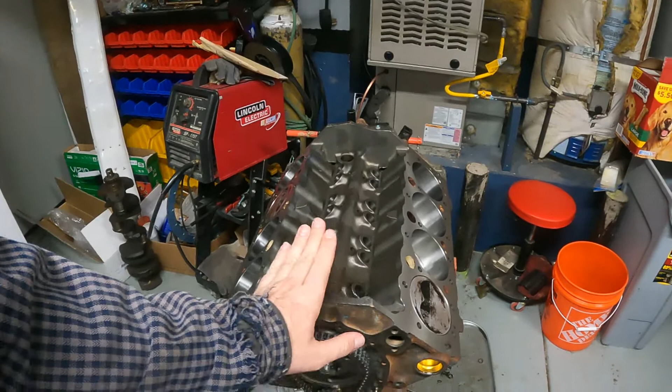I'm Wade Lumsden, and today we're going to jump back on to the hobby stock / street stock build that was supposed to be temporarily for the modified, but by now you guys have seen that I went a different route, and there is a crate motor sitting in the modified. So we'll get back onto that shortly, but for right now we are going to jump back onto this and cover a couple other things. So let's get to work.

Okay, so first things first here. When we did this, it was kind of chaotic, and yeah. Anyways, we did it. We degreed the cam, and then we just moved on. We didn't show you how to check that it was degreed properly. Check it against the numbers on your cam card. None of that. We just degreed it and moved on.

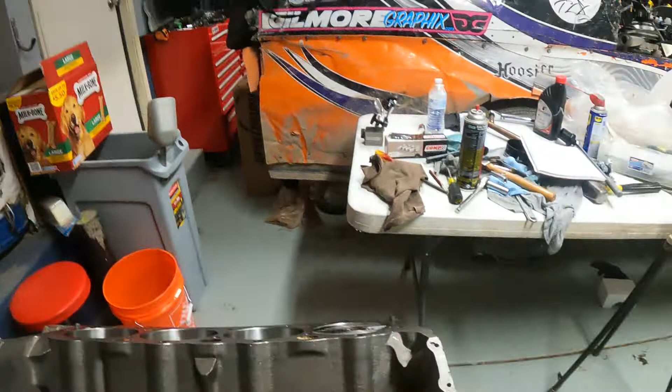And I also did it incorrectly, I guess. I used the lifter that would go to the exhaust valve instead of the intake one. You should do it off your intake. I mean, really, in a perfect world, it works out to do it off of either, because valve timing is valve timing, right? So I should be able to check the locations for the valve timing, and it should still read okay, but really you should be doing it off your intake.

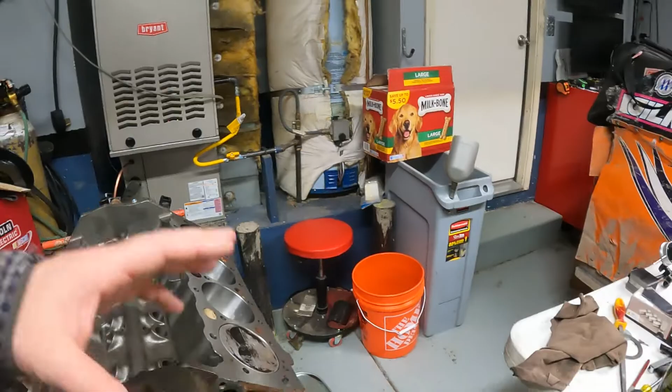So I'm going to quick put this back together, degree the cam one more quick time, and then show you how to verify that it's correct versus the numbers on your cam card. And then the other little piece of this video, there's actually going to be no real assembly. I think by the time we get done doing this, it's going to be a long video anyways.

But we're going to talk about quench, how to find your quench, calculate your quench, and all of that happy stuff, because we are getting really close. Oil pan and oil pump came in, so we're pretty much ready to start putting the bottom of this thing back together, finish doing that, and then we got to move on to heads and stuff, right? So we might as well prep and make sure that we're ready to do that as well. So let's get into this degreeing of the camshaft and checking it real quick, kind of as a part 2 / follow-up of the last video. So here we go.

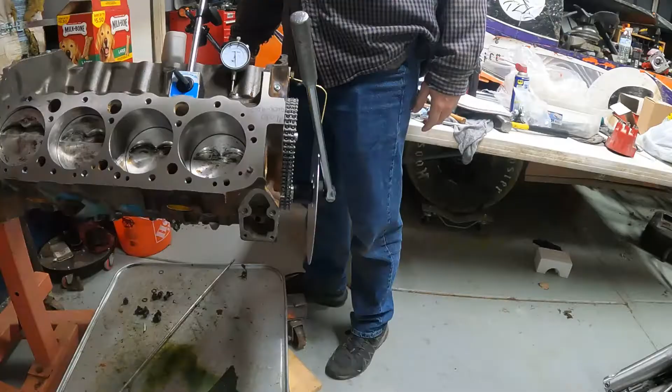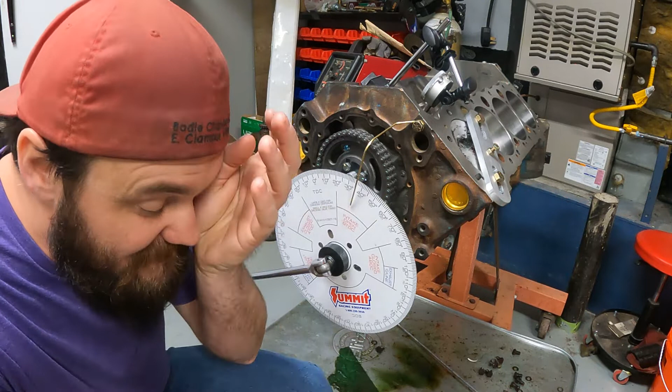Oh my god, I haven't been recording this whole time. All right, well, this is round I don't know how many, because in re-recording all this for you, I just went through this whole process and realized the camera didn't pick any of it up. So here we go one more time. Oh my goodness.

All right, so I got my homemade plate here. Stops my piston before top dead center. Okay, we are up against it right there, and we get a reading at 35 degrees. Now we're gonna go all the way back around until the piston touches again. Okay, and we should get a number, and that number is 1. No, sorry, that number is 4. So we got 35 degrees plus 4 is 39 degrees. Divide that by 2. That is going to be 20 degrees, basically 19.5.

Should be able to crank this thing all the way around. It'll stop there. We're going to back our bolt out so that we can continue on. And then if we go to 19 degrees right there, check it out, 19 degrees, boom. We are now at top dead center. We are at measured top dead center right there. So what we do is we loosen our wheel, and we actually put it to 0 where it is actually top dead center, right?

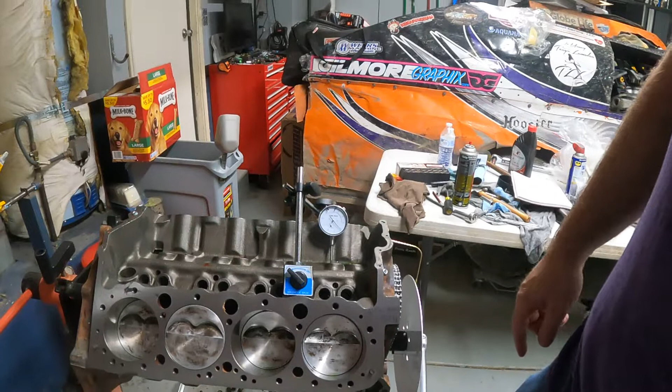Let me lift you guys up so you can see in there just a little bit better. This one's the intake. So this is what we got to do. We now need to find the peak of the lobe lift. So we're going to spin this thing around, and the lifter's going to start coming up.

Like that. And once it starts going back down, we'll know that we found the peak. It's already at 0 because, like I said, I had already done this before. So right there on the 0, great, you'd zero out your gauge if it wasn't, but that's your peak. Now you're going to go 50 thousandths past that when it comes down to the 050 here. Oh, a little bit past.

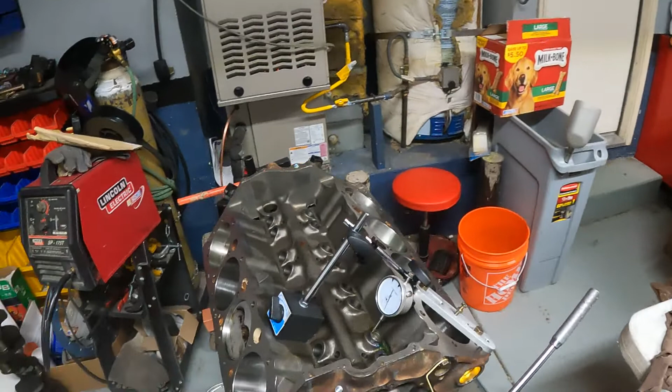So you always want to come to it spinning in the clockwise direction, right? So if you go past, you've got to back up past it and then come back to it. There we go, 50 thousandths. Now I'm going to look at my wheel here and get a number. My number is going to come from the small set of numbers on the wheel, reading in this direction.

And I like to put the tension back in the same direction, because this is just a little bit loose on there, in the same direction as what I started with. So I've got to put a little bit of back pressure on it. And that is going to give us a reading of 29, right? So see how when I drop it down here, it actually drops to like 27, 29, because my 0 was found with tension hanging over here, right? So we're gonna go 29. I'm gonna write that number down, 29 degrees.

All right, and now that we've done that, we're gonna go back up to the peak and we're gonna come back the other direction, which we'll have to pass it and come back to it, 50, boom. And we're gonna get another reading. Our reading here, again, this is leaving some tension going in the counterclockwise direction, and we're reading off the low bottom numbers here, 119. So we're gonna write that down real quick.

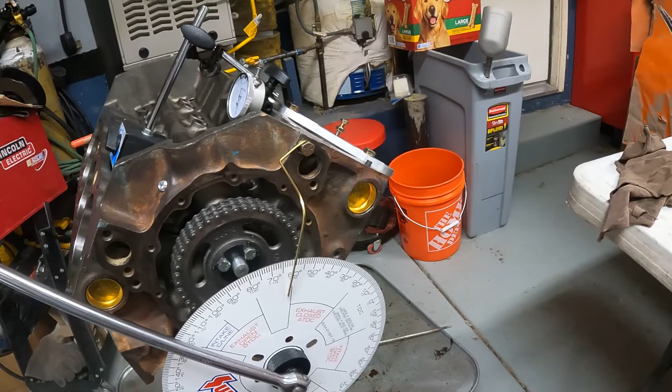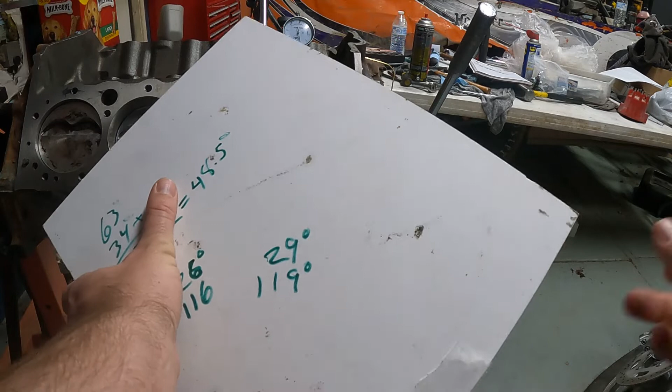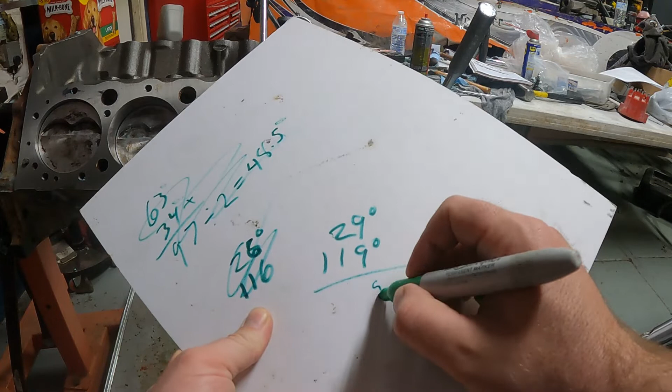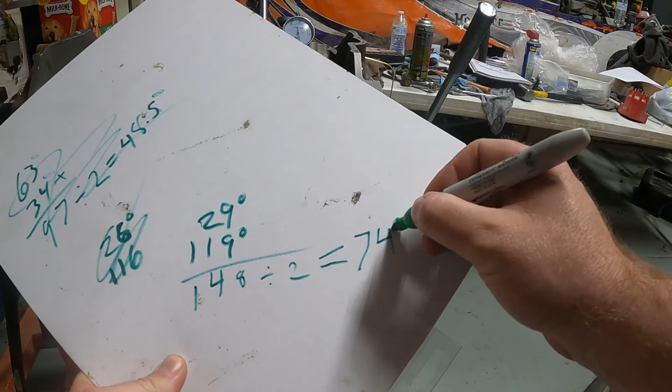All right, so now the important part of this is the 29 plus 119. We're gonna add this together. Don't worry about these numbers, that was from earlier when I had already done this before. We're gonna get 148. We're gonna divide that by 2, and that is going to equal 74 degrees right there. All right, now that we have that 74 degrees, I should be coming to 74 degrees on here.

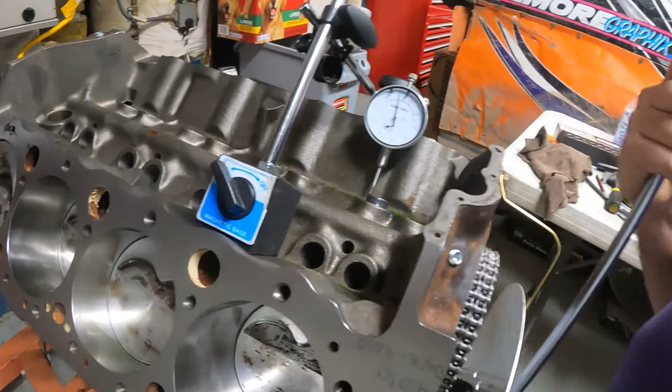Oh, we passed it, sorry. 74 degrees here, which is gonna be right there. And if we did that right, yep, look at that. Lands on the peak. So we know the peak is at that 74 degrees right there. Okay, so now, still using the small numbers here, we got that 74 degrees, and so we rolled this over to 74 degrees using the small number. And if we go up to the large number, we will be at 106 degrees right there.

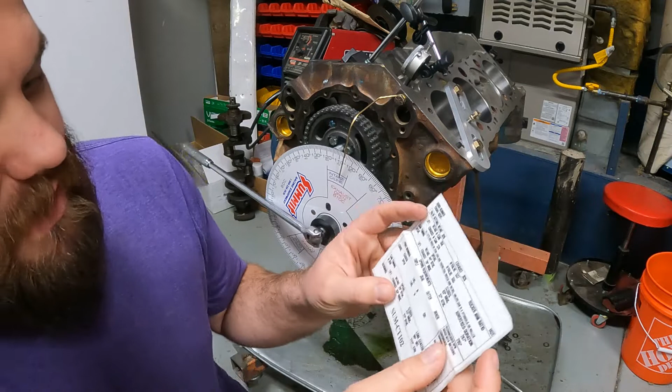So this says that having that set up and putting this at that number that you calculated, this going to the 106, that is telling us that right now the center line, the center of the lobe of the intake valve, is sitting at 106 degrees. Okay, according to my cam card here, my lobe center should be 99 degrees on the intake. So that means I'm way off. That means I did it wrong the first time, especially when I set everything up off of the exhaust. So my bad.

So I'm gonna adjust the cam again real quick, and we'll run through this again, and hopefully when we do it that way, our numbers all come out right, and then we can check the rest of the cam card: where it opens, where it closes, and all that happy stuff. So let me readjust this. I'm gonna do all of the other stuff again off camera, and then I'll do the 50 thousandths number with you guys. So here we go.

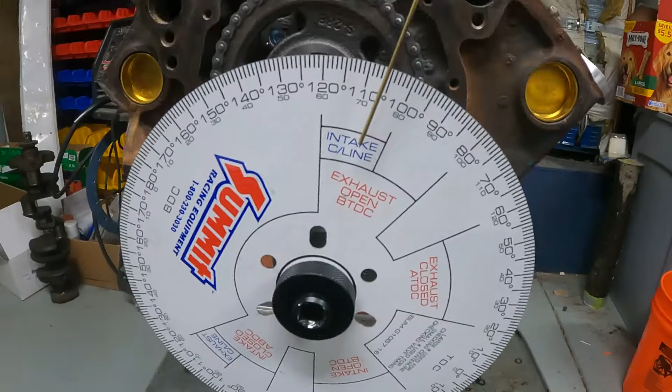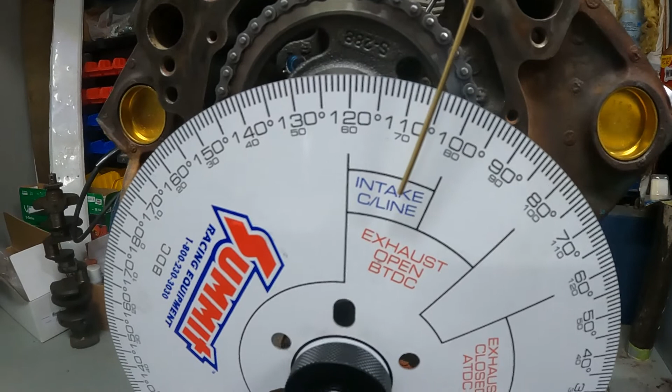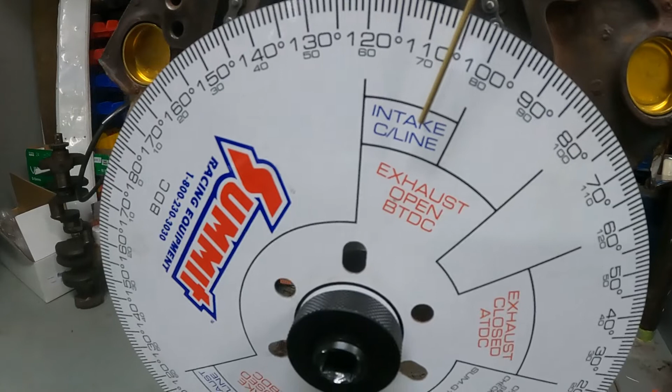All right, so I just want to clarify this. So I'm at the 74 on the low number, right? And what my cam card says is my lobe center should be 99 degrees on the intake, right there, 99 degrees before top dead center. Well, here's TDC. We come around, 99 degrees is here. We're at 106. So we're 7 degrees off.

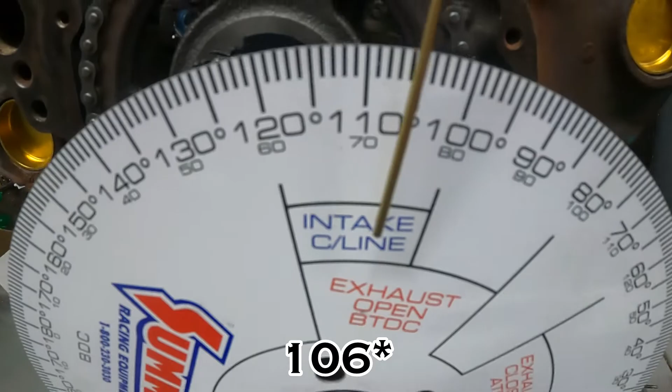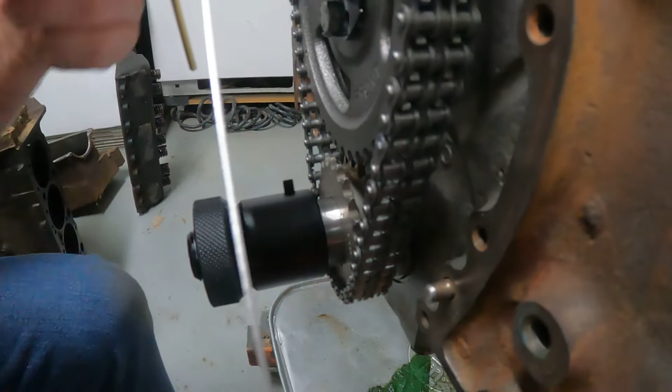That means when I originally did my cam timing, I must have been a little dyslexic, and I advanced it 4 more degrees instead of retarding it 4 more degrees. My bad. Is what it is. Let me get that fixed. That means I've got to take the gear off down below there, rotate it to the retarded position, and get everything buttoned back on here. So I'll come back to you.

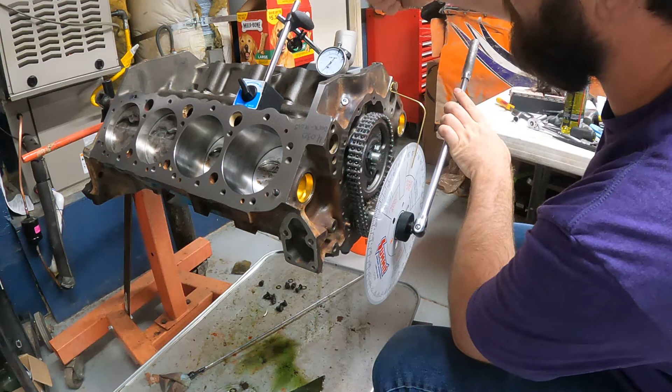Alrighty, so we're reinstalled. We're gonna come up to the 50 thousandths from the peak. I already went to the peak and went back. That number is going to be 127.5. 127.5. Let me write that down.

So now on the wheel, I'm going to go to 82.5. And that should be right at the peak. And it is. Voila! Our peak is at 82.5, where we calculated it. So now we'll go back to top dead center here.

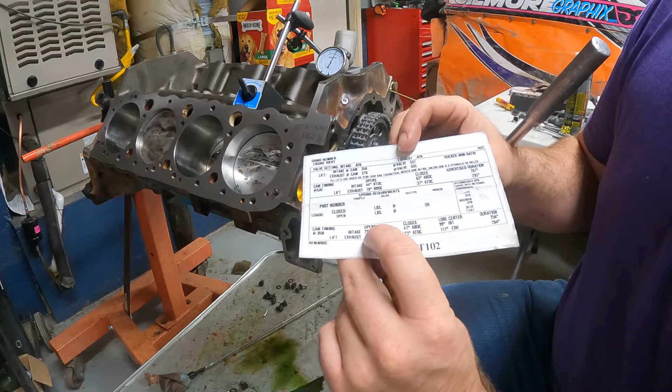and according to this, at 50 thousandths, the intake should be at 29 degrees before top dead center. And if I come over here, we are at 29 degrees. So, I'll show you what I mean if you guys need a better look. Right here, we're at 29 degrees.

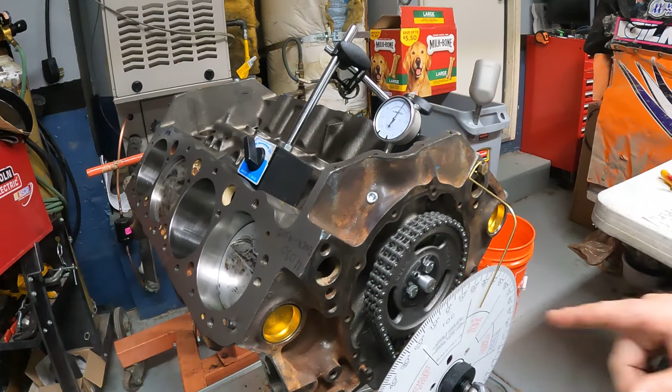Remember, we zeroed this out on the back side of the lobe where there was no lift, so it's completely zeroed out. And then we cranked the dial indicator to where it had 50 thousandths of the lift, and then that stopped at 29 degrees, which according to the cam card, before top dead center, TDC is right here, 29 degrees, right? And so it should also close at 47 degrees after bottom dead center.

So now we're going to crank until we're at, there's the 180 mark, so that's bottom dead center. And our goal, if all things are right, this should stop at that 50 thousandths at 47 degrees. Oh, yeah. There we go. Whoops. So you can go all the way back to 0, right? There's 0. And come back 50 thousandths from it.

Then if we come and look at the wheel here, we're looking for 47 degrees after bottom dead center. Bottom dead center, 10, 20, 30, 47 degrees. 47 degrees after bottom dead center. Boom. Now the lobe center should be at 99 degrees.

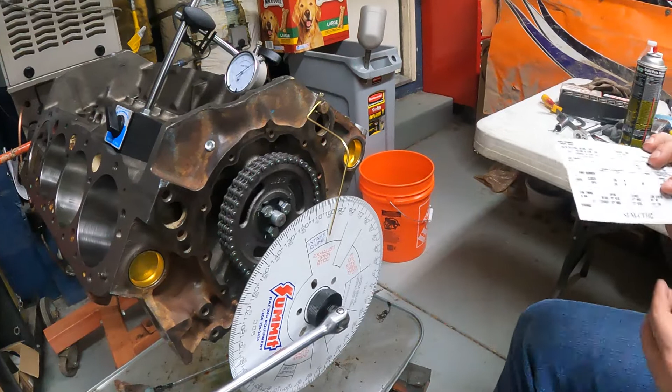We'd already checked that. Right at 99 degrees, maybe 100, somewhere in there. But that could be in the dwell. I'm sure I could back that off a little bit. That's still in the dwell there. So, intake opens when it needs to, closes when it needs to, lobe centers where it's supposed to be.

Alright, so I just want to make sure, because the confusing thing on this normally is the math, right? So we found our two numbers, our 50 thousandths number on both sides of the peak lift, okay? We found that one of them was 37.5 and the other one was 127. We added those together, got 164.5. And then divided them by 2. That gave us the 82.25.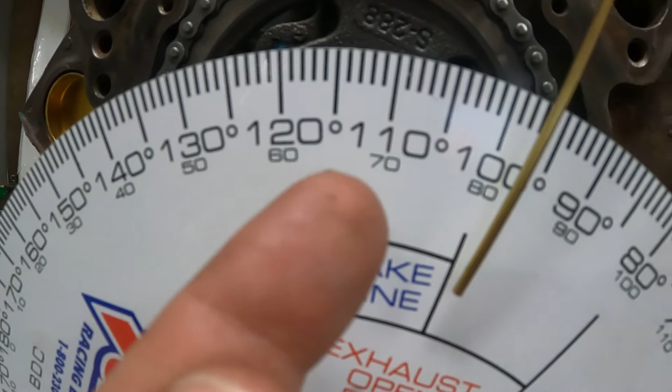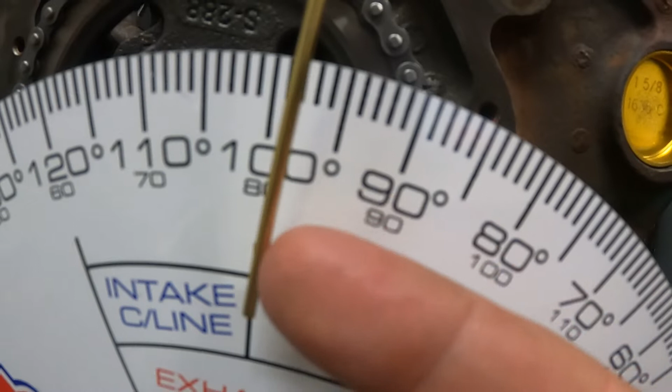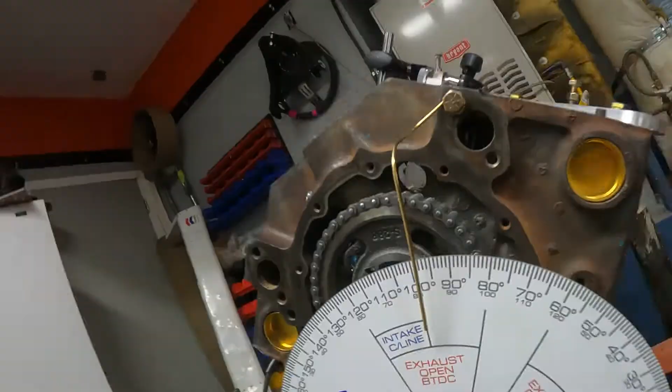Okay, and then we came over to our wheel here. And we're reading this direction on the bottom number to 82. Okay, and then we are translating that up to the large number, right? Which is, now our numbers are going the opposite direction, right? So now we're reading from this way, 80, 90, we lined it up with the 82 down below, 95, 96, 97, 98 and a half, 99, depending on which angle I hold the camera. But basically 99. As long as you're within 1 degree, you're good.

So that's where the lobe center 99 on your cam card is coming from, and that's how you translate it from the number that we calculated. I just wanted to make sure that that was clear, because sometimes it's not clear and you end up running around in circles.

So when we did all this off the exhaust, it messed us all up, and we ended up advancing the cam, and what I ended up having to do is come back and retard the cam back to standard. So in the end, I guess I did it wrong twice, because I did it once and that told me to advance the cam, and then I did it wrong again and that told me it was right, using the exhaust portion, but reading the wrong numbers and stuff. So I mean, I way messed it up.

So that's the quick rundown on degreeing the cam. I'm glad I did it again. That way it was correct. Now I gotta lock it in place and do that mess. So I hope that was way more clear than last time I did it.

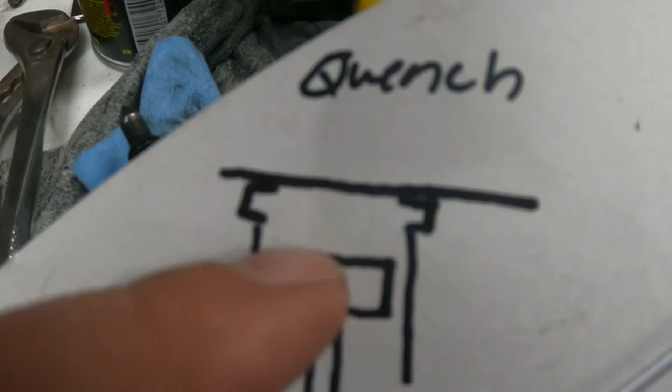All right, guys. So let's quickly discuss quench. Quench is the space at top dead center from the top of the piston to the bottom of the head here. This little C looking thing is supposed to represent the head gasket. So there's a clearance in this area. The tighter it is, the more control you have over the flame inside the cylinder. The looser it is, there's a difference between trying to control something in a big space.

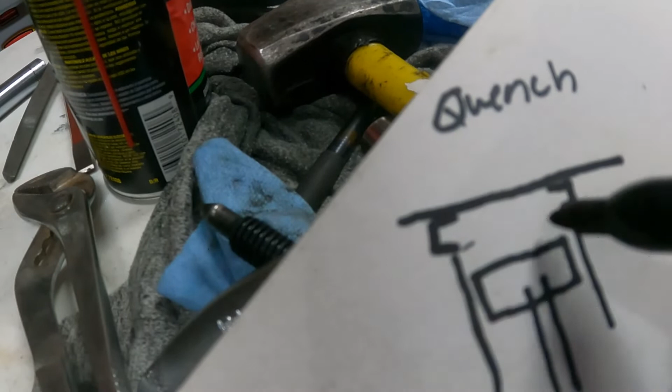Think of it like kids, right? Or animals. You give them big space, they're a little harder to wrangle than if you put them in a smaller space. So I'm not sure if that analogy works great or not, but bigger space, you have a little bit less control over your flame travel and stuff inside your cylinder. So the goal is to make this as small as possible, like up into here, right? So that you only have this much space and you're squeezing the fuel more, and all of that happy stuff.

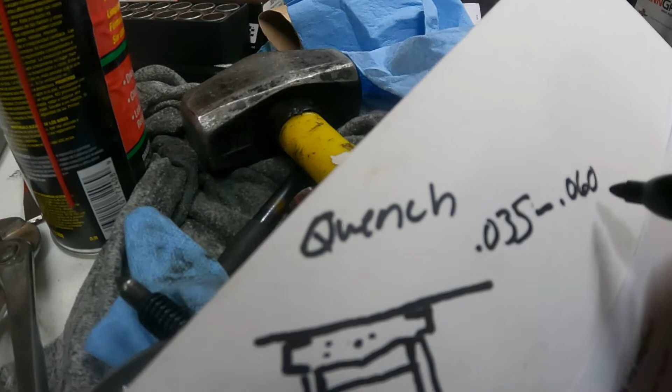There are really cool videos out there that describe all of this and its effects. Basically, for our application, we want to be 0.035, and the absolute max is 0.060 that we want to go for. Once you start going above 60 thousandths in your quench, you can start creating detonation problems. Now I think there are some applications where you want to get up into like 90 thousandths, but I think that has to do with forced induction stuff. For our application, this is the ballpark we want to be in.

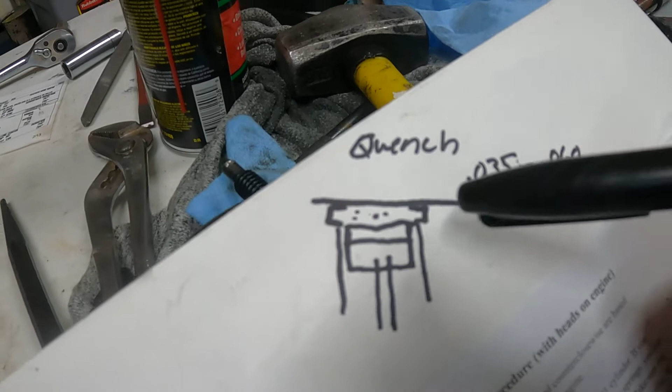Okay, and the reason why we want at least 35 thousandths of clearance here is when the piston gets hot, it expands, right? And so we want to leave that 35 thousandths clearance for heat expansion, so this piston and rod doesn't get longer and start smacking the bottom of the head.

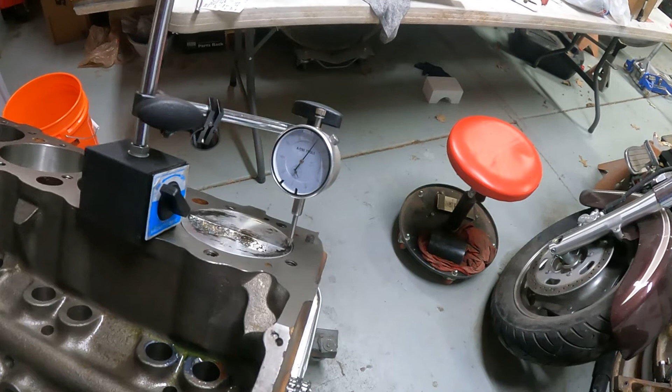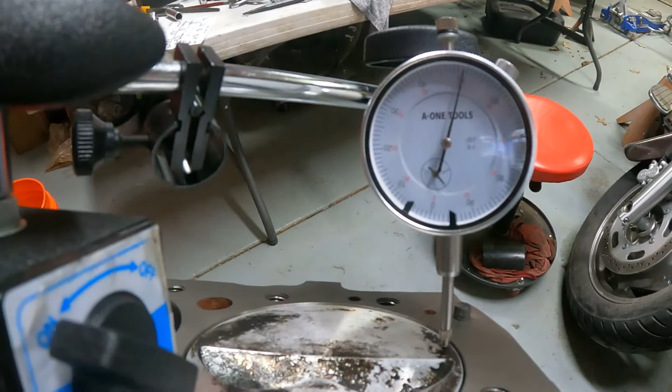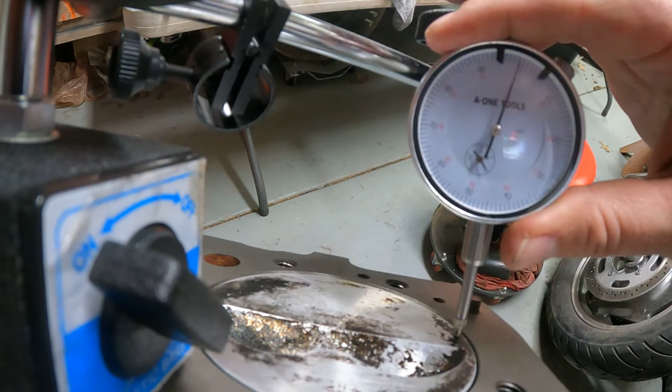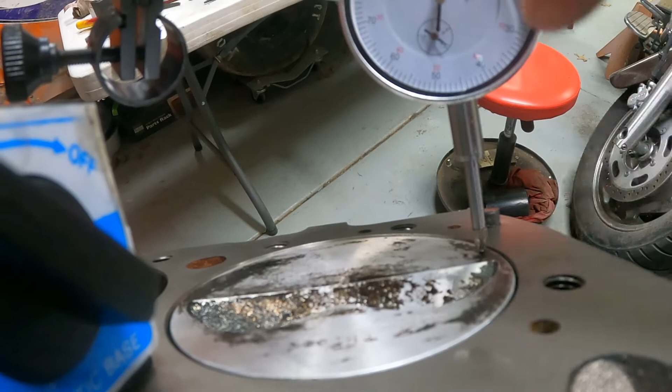So quick way to check that, back to our wonderful dial indicator here, we find top dead center, true top dead center, with our dial indicator. So we're going to find the high point. I'm trying to do this with one hand, so it stopped there. Let's zero our gauge out. Okay, zeroed. So now we want to know what the difference is between here, where we know our piston is down in the cylinder, and here. So really, we need to get this rotated over onto the deck.

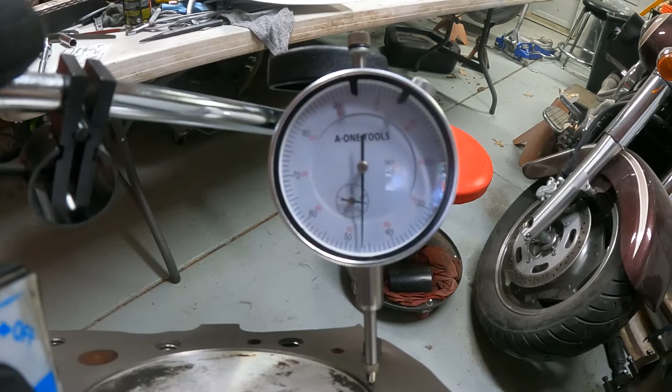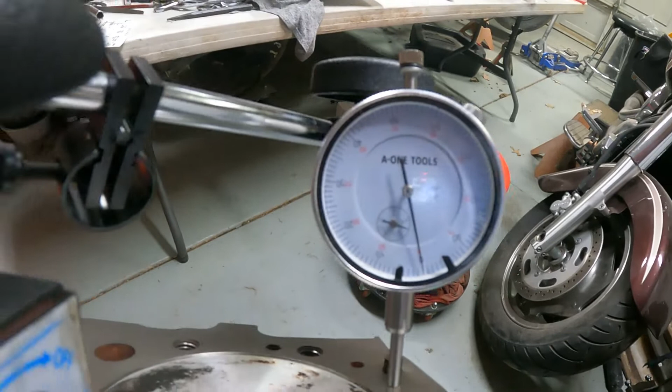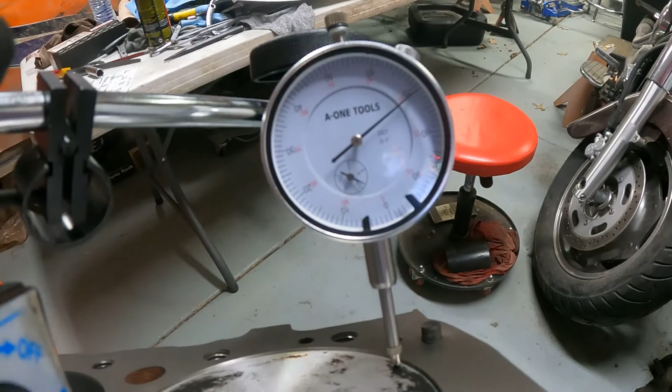Take a reading. Boom. You can also zero it here if you want. So we're at 0 there. And so now all we're going to do is rotate our assembly to be there. And it looks like it moved 29 thousandths. Right? So that's generally how you do it.

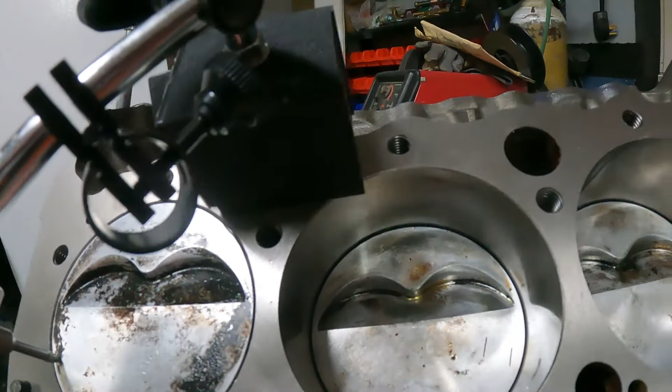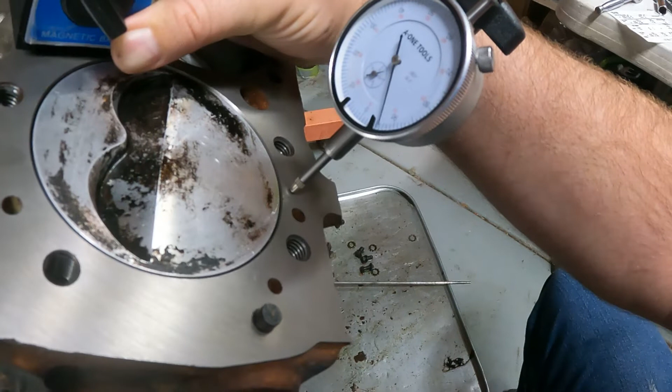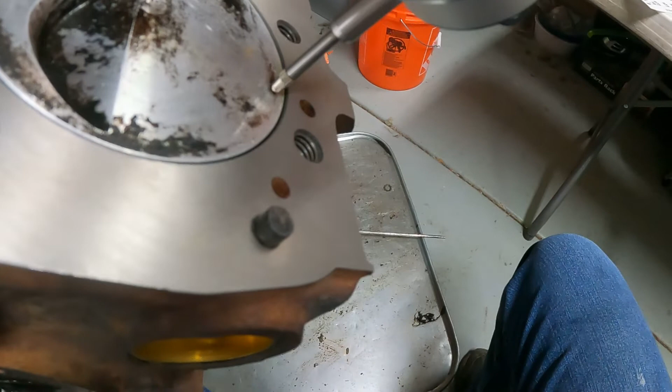The reason why I try to measure in line with the wrist pin here is because you don't get really any movement. Many people will measure the difference way down at the top and bottom of the cylinder, like so, right? So we'll zero out here. Whoop. Okay. 0, and then we'll get it over onto the piston. Okay, and it looks like it moved 10, 20, 35, 36 thousandths, right?

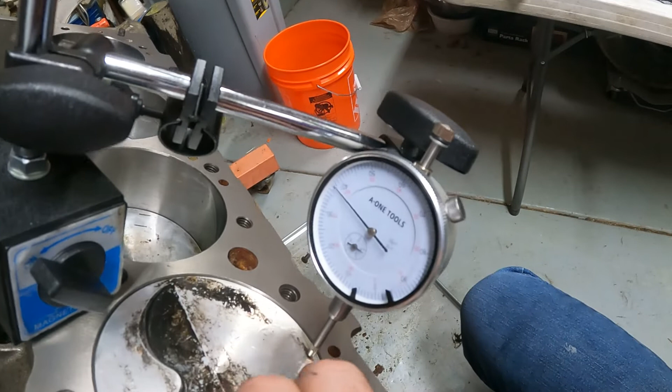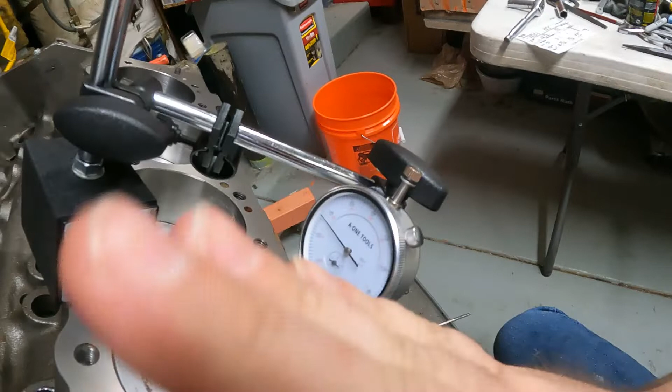But on the far end, you can see I'm pushing down with my fingers here on the ends of the piston, and it's affecting the reading, right? That's that rock that you can get with the piston, right? Minimum, maximum. A lot of people will take the minimum and the maximum, average them together, and use that. I tend to try to stay on the safe side of things.

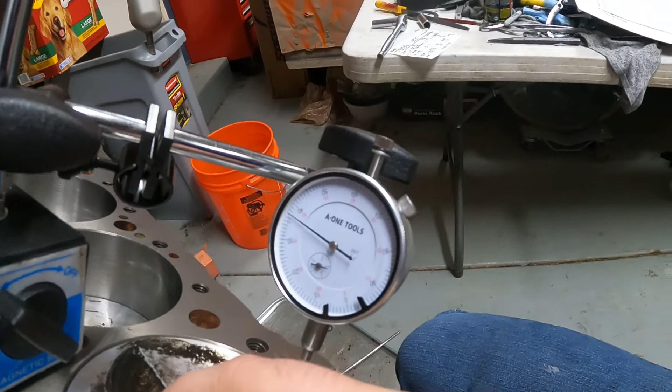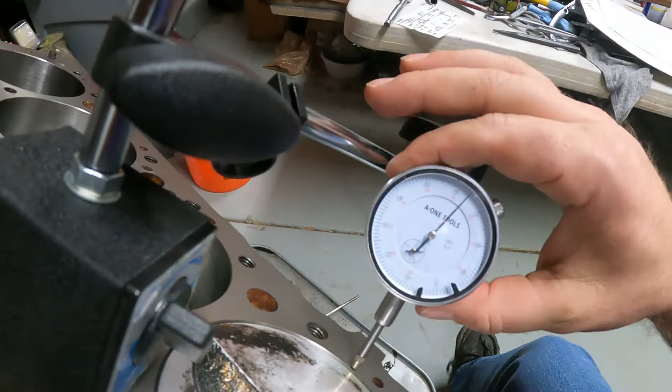Ooh, and use the maximum changes. Use the most extreme deal, because I want to make sure that I have enough space here, right? So we measure one more time. Again, this isn't perfect, right? If we wanted to do it absolutely perfect, we'd have this thing perfectly straight up and down, and we'd be doing our best not to be rocking the boat a whole lot here. So we're dropping.

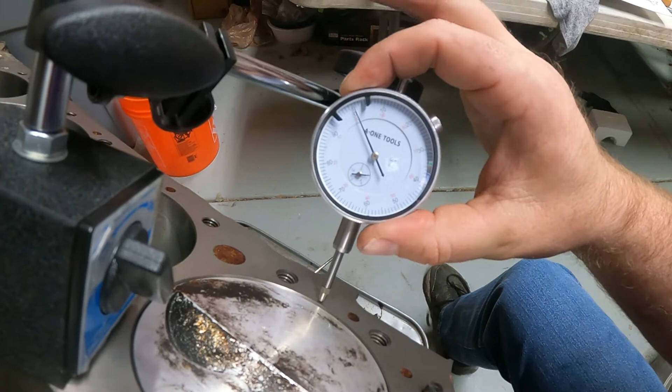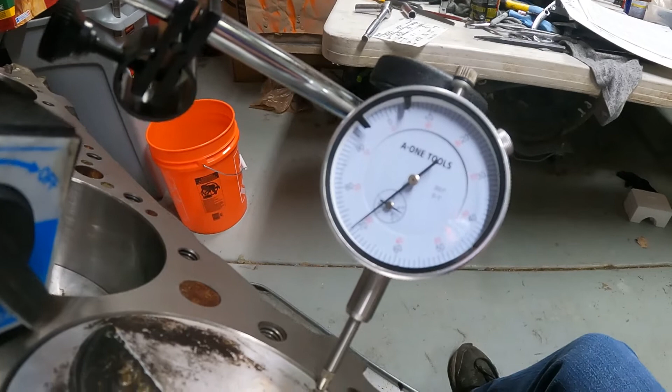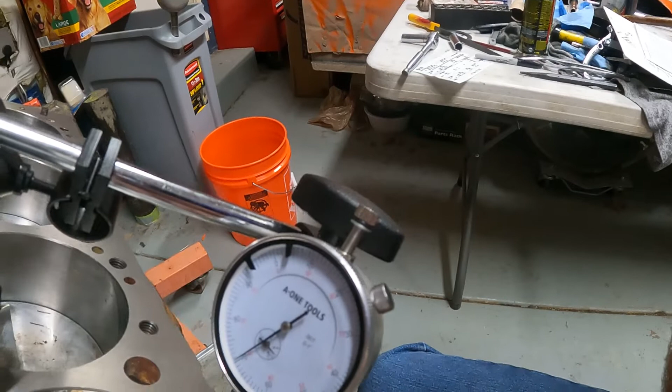So that one dropped 29 thousandths. So if we just guesstimate, we've done 29 thousandths, right? Push it up, that's 25 thousandths. If I push it down, it's 30 thousandths. So the least amount of space possible. But if we did the 25 and the 30, and then divided by 2, we would get, oh my goodness, 27.5, right?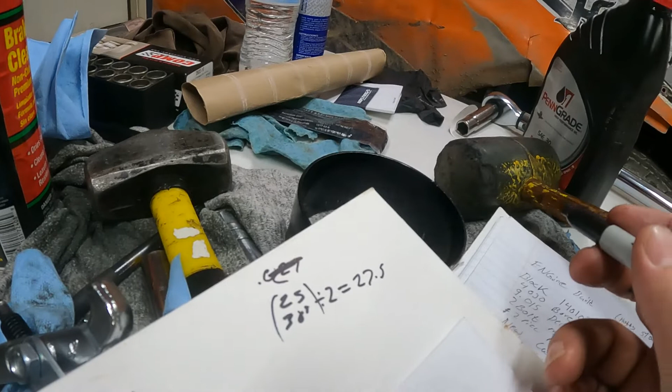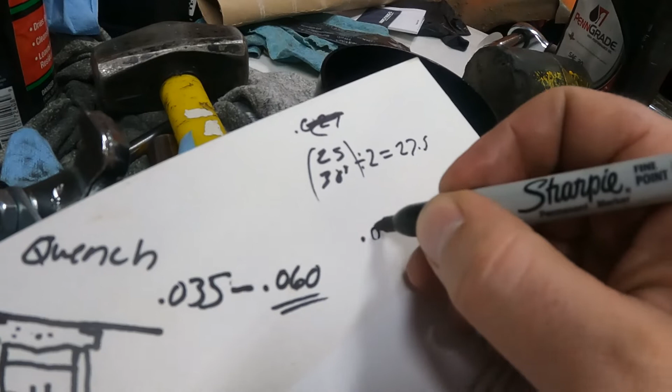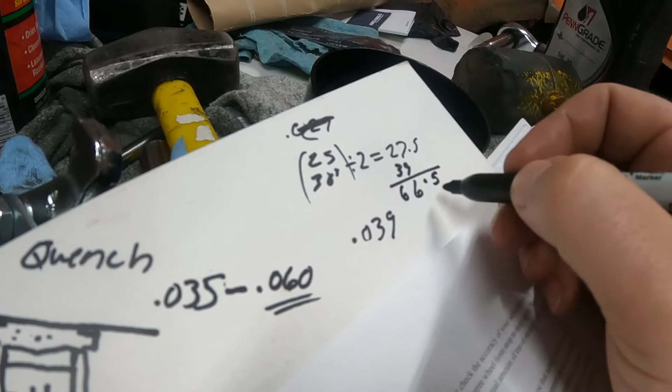We get 27.5. So now we're going to go to our gasket set, and we're going to figure out what our crush is on our head gasket. This right here. Crush on our current head gasket is 0.039. Now we're going to add these two numbers together. So 39, and this is going to give us 66.5. We have a lot of quench.

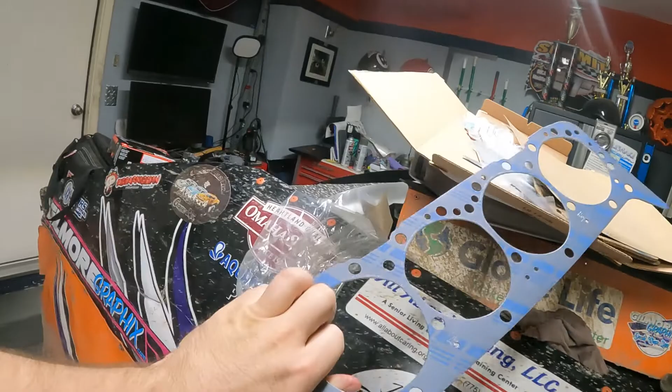Again, not exactly a DIY, right? This is just me showing you the premise. When I actually set up and did this really well and had both hands, I calculated out my quench to be 62 thousandths of an inch. So we were still over 60, and that's using the gasket set here. I looked up the part number to this head gasket that came with my kit, and it's got a 39 thousandths crush. So that's a lot for us. We'd like to be down in the 35 thousandths, at least in the 40 thousandths range. So most likely I'm going to end up going to Summit and getting a thinner head gasket to bring my quench down.

So that's the basic premise of quench, and I hope that made sense to you guys. If it doesn't, let me know. Again, there's a bazillion videos out there on YouTube that cover quench really well. I'm just bringing it to your attention in case that's stuff you've never heard of before, so you can go do your own research on it too, right? So, sweet, moving on.

Alrighty, so one last thing I forgot to mention: when you're checking your quench, you should check your quench in multiple cylinders. That way you're triple checking all of your work.